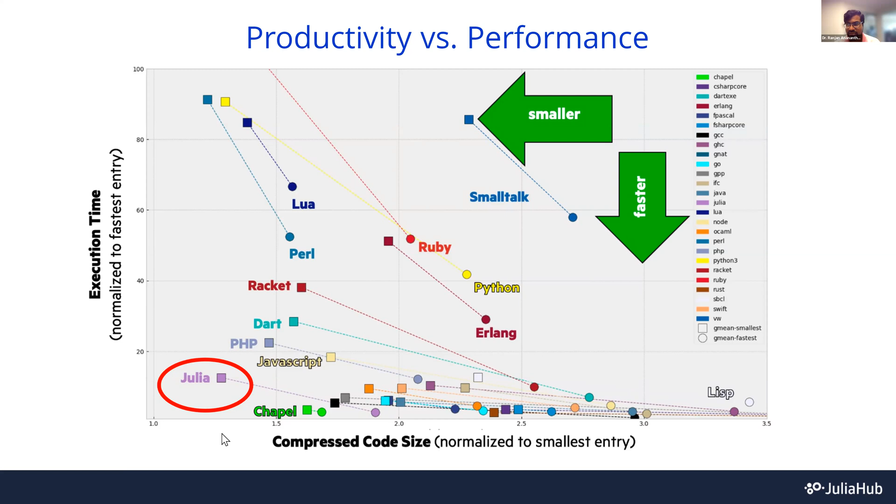If you look at this little chart over here, which was released by the Chapel folks online, Julia has pretty low execution time, on the y-axis, and pretty small compressed code size, which is the x-axis over here. And so Julia strikes that balance in a pretty good way, in terms of productivity and performance. We're a company started by the creators of the Julia programming language. And one of the advantages of having a language like that for scientific computing and modeling and simulation is you get really fast solvers.

We've, in our academic branches and in the open source, been working on really fast differential equation solvers that tend to be an order of magnitude or two orders of magnitude faster than the competition.

And if you look at the little chart on the right, we call these work precision diagrams. So how much time, computational or wall clock time, do you need to spend to get to a particular precision? And the lines at the bottom of the charts over here are the Julia solver lines, which means you get a lot more precision for less time.

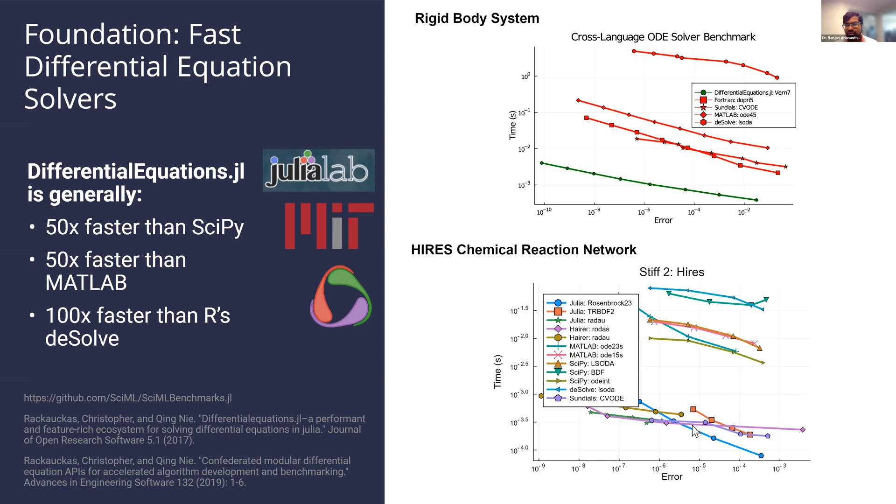So that's sort of the open source or the academic foundation. But now we're a company that develops products, which have this open source foundation. So the product we're looking at today, and the one that Brad is going to refer to for his model-based design needs, is called JuliaSim, and we call this scientific machine learning for our enterprise customers.

So to give you a little brief about what scientific machine learning is, it sort of is a confluence of the traditional modeling and simulation domain, which involves model building, solvers, controls, and machine learning, which involves neural networks and the neural networks world in general, and involves automatic differentiation, backpropagation, and terms like those.

And so what you get when you put both of these together is simulators that can be differentiated. And a huge advantage of that is that it automatically accelerates design optimization. In design optimization, you might want to take fewer iterations, which you can do if you get gradients. You also get good surrogate models. You get inverse problems, of course, and gradient calculations help those inverse problems as well.

You get equation discovery. So can you do a physics augmented model discovery approach? So you have a physics-based model, you have data, and you want to discover missing physics to append to the physical model, and use it in many low data contexts, which is common to a lot of our customers in the engineering domain.

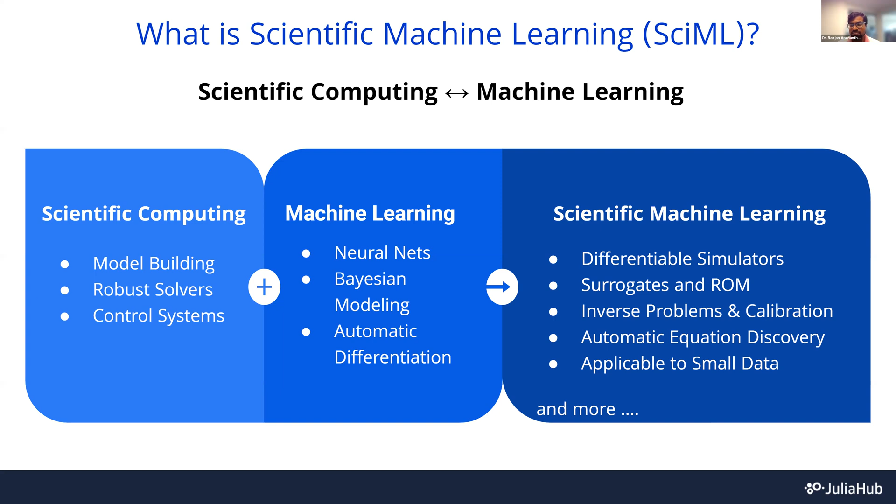Today's webinar has a lot more to do with the traditional modeling and simulation world, a little less to do with the machine learning world, but what we try to do at JuliaSim is to service the broad variety of needs there. And the way we do this is based on an open source foundation with Julia and the SciML open source organization.

And we have a design language called ModelingToolkit, which we'll refer to extensively today. ModelingToolkit itself is open source, but we have a bunch of standard library components and proprietary components that are part of our JuliaSim offering, which helps you get quickly started with ModelingToolkit and JuliaSim.

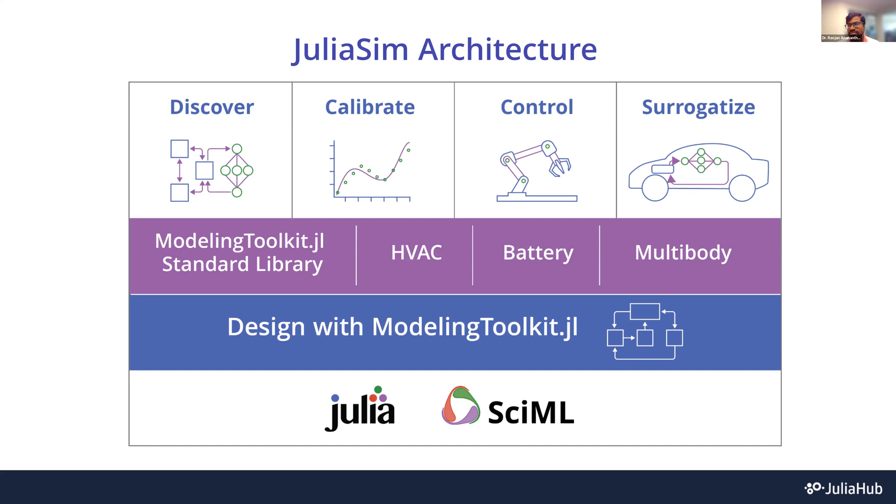And of course, on top of our models, we have our numerical methods, which are to do with model discovery, as I mentioned earlier, calibration, control, building surrogate models. So that's the broad set of capabilities for JuliaSim.

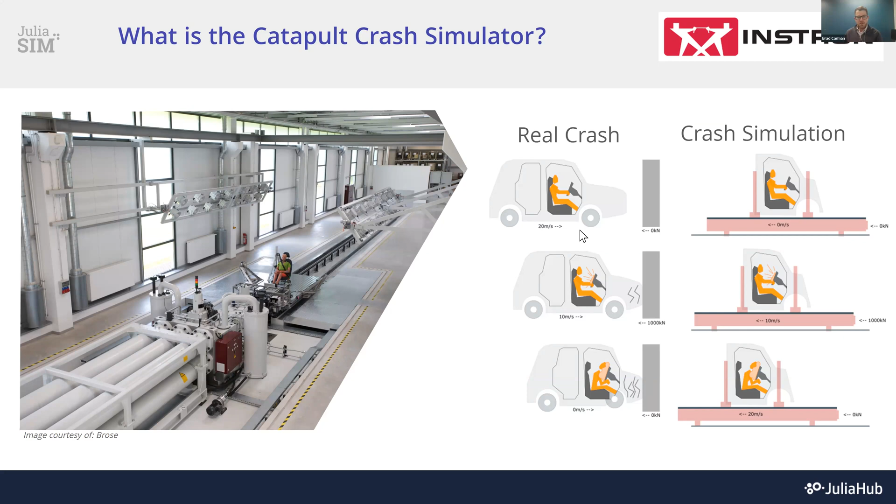Is that correct? Yeah. So, actually, if you want to go to the next slide. There we are. I can explain why we ended up having a model in the first place. The model actually originated not because of design purposes, but because of operation purposes. It's kind of a long story how the system actually operates. But in short, as I said, it's a programmable system. So it's controlling the output, this 100 milliseconds window of force signal being played out.

We have a controller that Instron produces that is actively controlling that. However, it's not actually controlling the acceleration output. It's only controlling the hydraulic valves of the system, which means there's this gap between the output of the system and what the controller is actively in charge of. So we call this an inner loop and an outer loop. The outer loop is the acceleration or force output of the system that the customer would like it to do. And because we have this disconnect, we have to figure out what is the signal that we send this controller that's going to give us that correct output of the system. And that signal can be calculated from an algorithm.

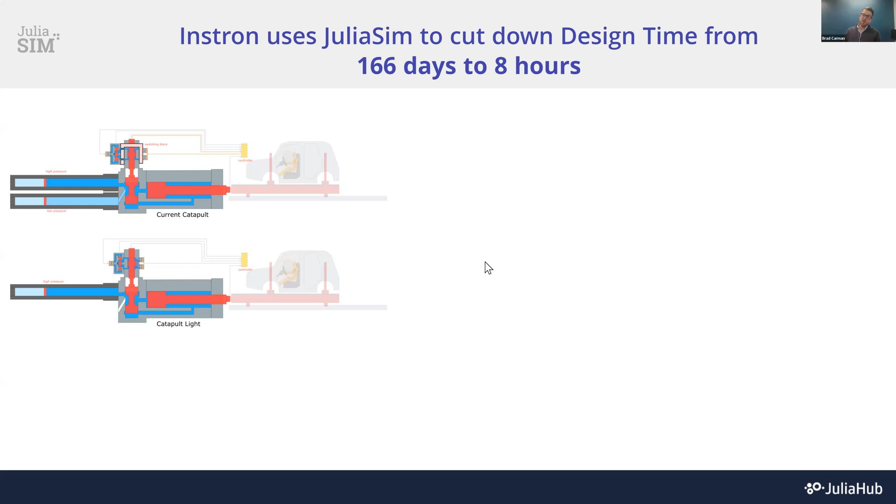I was also in search of speed, because at the same time, Instron was also coming out with a new controller that was a much faster controller running at 10 kilohertz. So I was motivated to not just get a better modeling tool, but a tool that could give me much faster runtimes than I could get when I just write the whole thing myself, right?

Right. So the business use case in many ways was to take advantage of the new hardware that is available, right? And incorporate that into the new design. Is that how you describe it? Yeah, trying to answer the question. Customers are asking for more challenging signals that are more dynamic, with higher forces, and how do we answer that question, right? Of what do we need to change about our system in order to achieve what our customers are asking us for. Right.

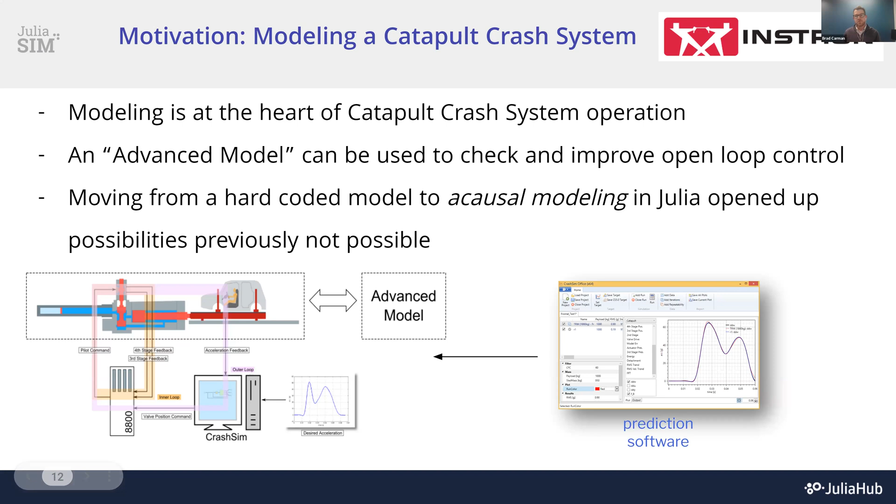And so you ported the model to Julia and JuliaSim. Was that 2022 or was that 2020, Brad? When did you first start using Julia? Yeah, I think it was around 2020. It was definitely when the pandemic hit and things kind of slowed down a little bit.

And at the time, I knew that Julia had the speed. And so that was kind of my first motivating factor. But I ended up getting lucky and learning that there were a lot of other big advantages that I got from moving to Julia.

Right. And so I guess maybe the first advantage to speak about is just the speed, right? So you ported the model over to Julia, and it ended up being faster, that you could actually use it for design, or in this case, design optimization.

Yeah. So the advantage that I got with speed from Julia was kind of a two-factor thing. So the first factor was the dual language problem, right? The classic, what is referred to as the dual language problem. So that helped a bit. That I didn't need to worry.

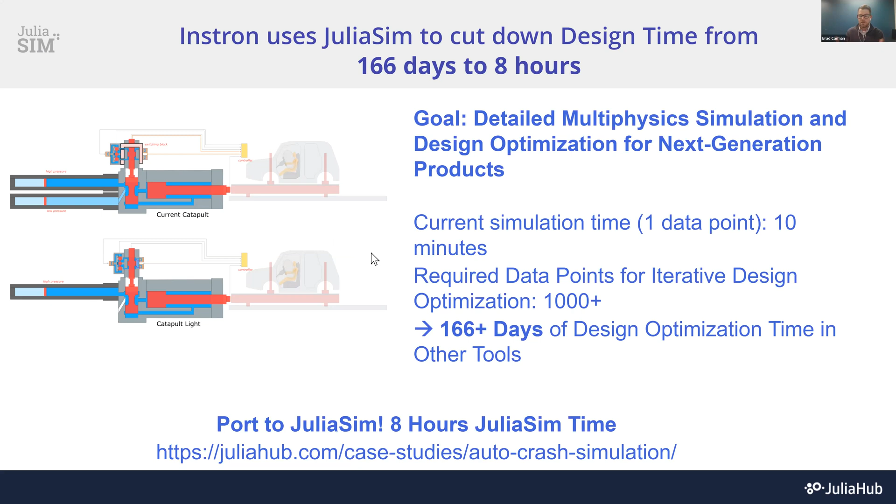But then now you have this opportunity to take a look at it. How can you make it even better? And in a lot of cases, that really just means you're just tweaking things. And you can actually sometimes get a huge performance improvement by just making small adjustments to the parameters of the system. So that's what I call model-based innovation.

That's fascinating. So we have a little bit about model-based innovation in the previous slides here, but we've spoken about that quite a bit, so I'm just going to skip those. But I do want to leave our audience here before we conclude with a call to action. So model-based innovation is, as I understand it, sort of a personal mission for you as well, Brad, which is why you ended up joining us here at JuliaHub from your time at Instron. Do you want to say a little bit about how this aligns with your personal mission, and what it is you're going to be doing at JuliaHub now?

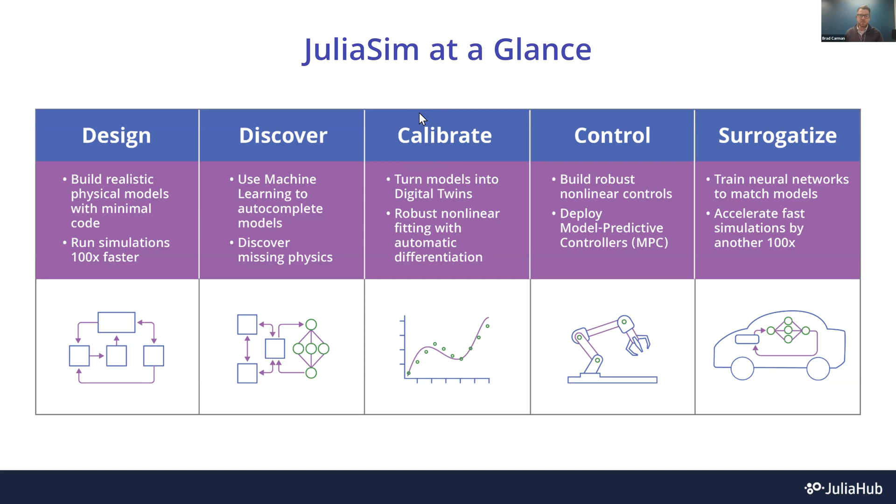Yeah, so I'm very excited to have joined the team, and like you said, my mission in life certainly is model-based innovation, because I see the power that it's brought in all those past examples. I'm very excited to help share that experience and to help other companies experience that as well. So I am starting by leading the consulting team, where we'll be able to offer that service.

I think a potential customer would be someone who is struggling to advance their product. They have some kind of problem, and they might be in need of modeling. If you ask yourself this simple question, are you doing trial and error to advance whatever problem you're trying to solve? There is a better way, and that way is with modeling, right?

And if I might add, I don't want to put too many words in your mouth, Brad, but if you're already doing modeling today and you want to do it better, you could perhaps talk to us and get on the next generation of modeling tools as well.